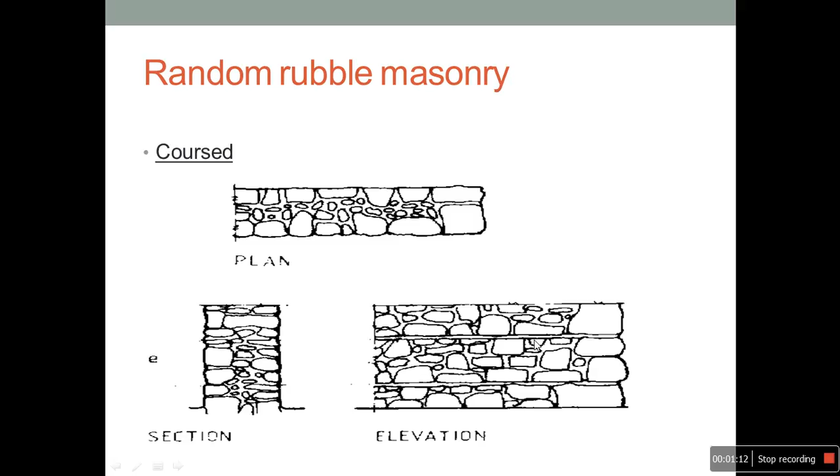This picture gives you an idea about random rubble masonry. Here the stones are placed randomly. The first one is a plan, section, and elevation. This is coursed type, in which stones of different shapes and sizes are roughly placed, and this is the cheapest form of stone masonry in which the stones are not cut into a desired shape.

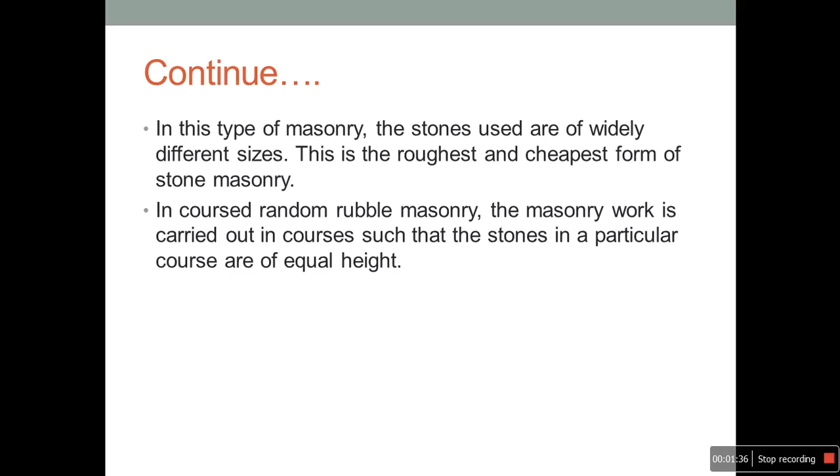In coursed random rubble masonry, the masonry work is carried out in courses such that the stones in a particular course are of equal height.

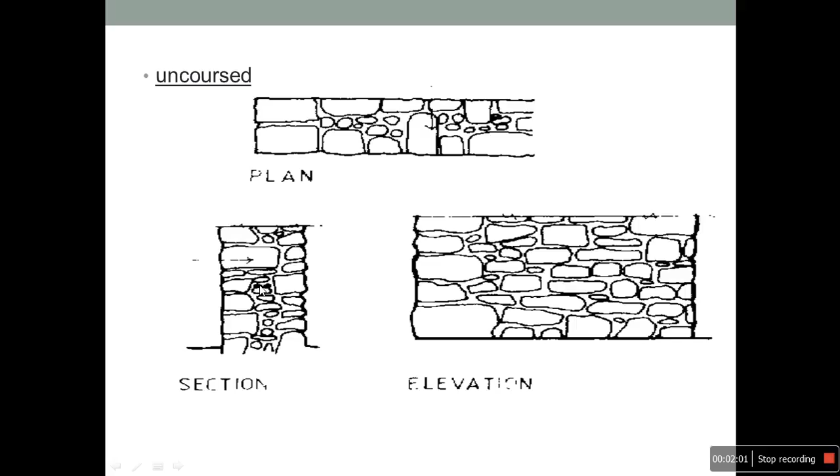In uncoursed random rubble masonry, the courses are not maintained regularly. Larger stones are laid first, and the spaces between them are filled with smaller spalls or sneeks.

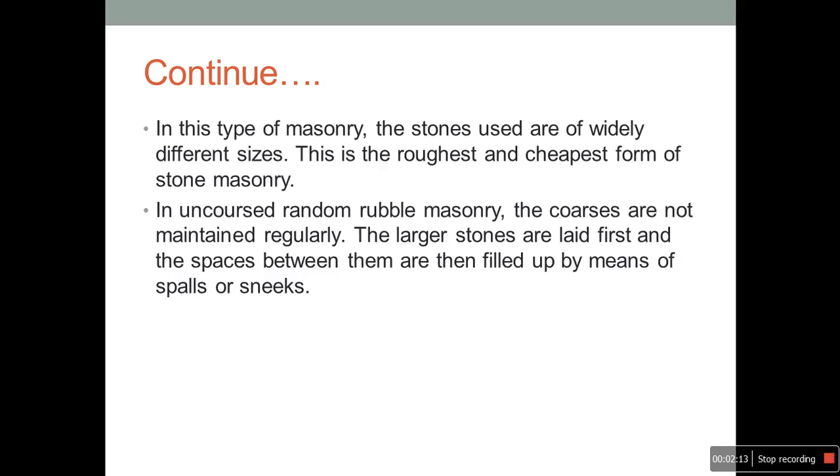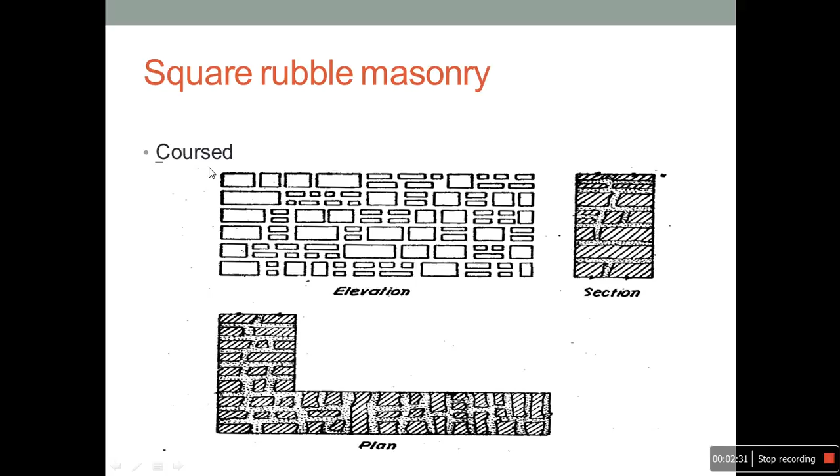Square rubble masonry is similar to random rubble masonry. There, different sizes of stones are randomly placed, but here the stones are cut into a square shape. This is coursed - you can see the elevation, plan, and section, in a regular sequence. This type of square stone masonry has a straight bed and the sides are used.

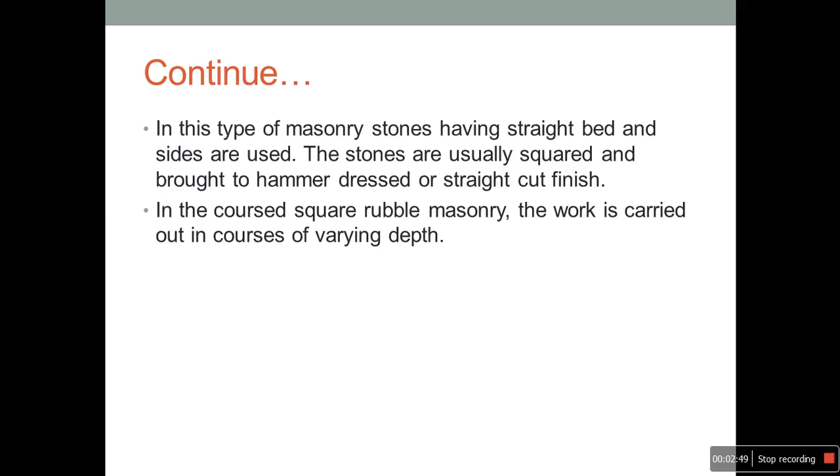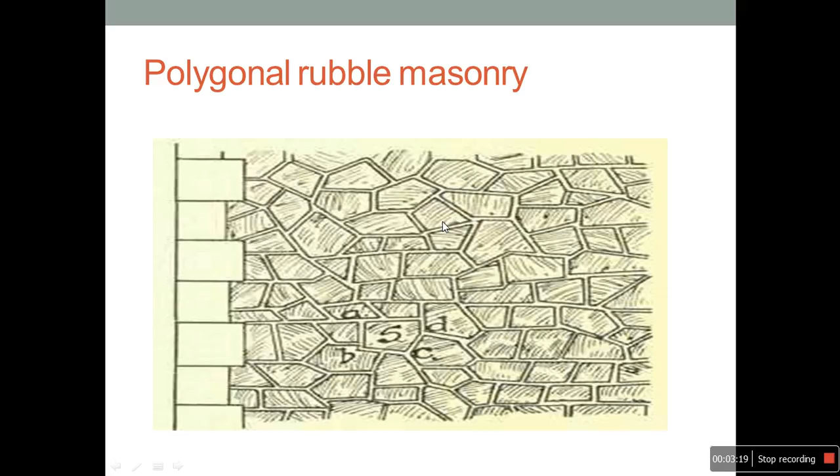This is polygonal rubble masonry, based on the shape - you can see the stones are in polygonal shape. In this type of stone masonry, the stones are hammered and dressed, and irregular polygonal shapes are maintained by cutting the faces of the stones.

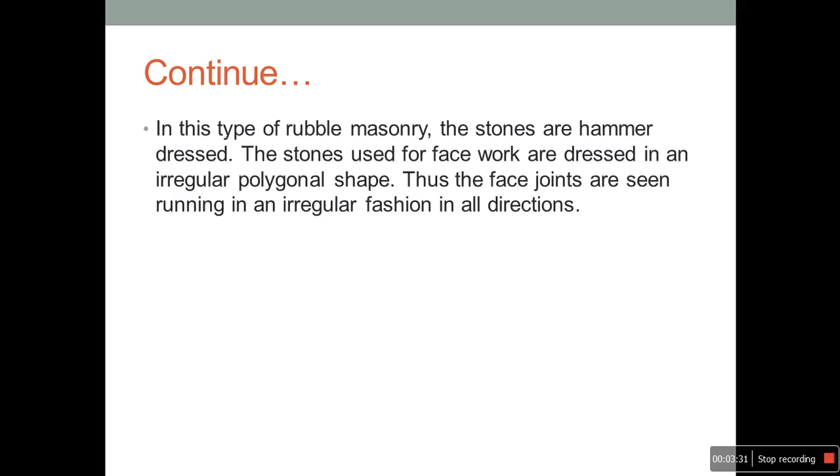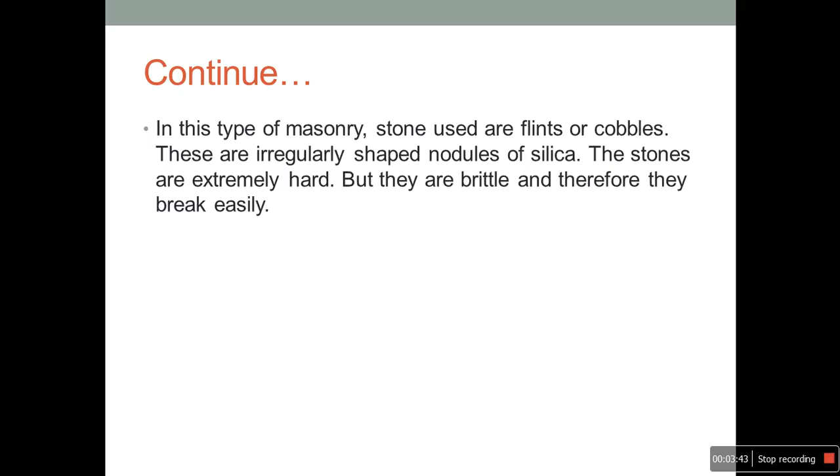This is flint rubble masonry. These are irregularly shaped nodules of silica. The stones are extremely hard, but they are brittle and therefore break easily.

This is dry rubble masonry, and these are the elements of dry rubble masonry. Back wythe, tamped gravel base for stable positioning, and in the construction, the first course is set in trench with the largest stones in front wythe.

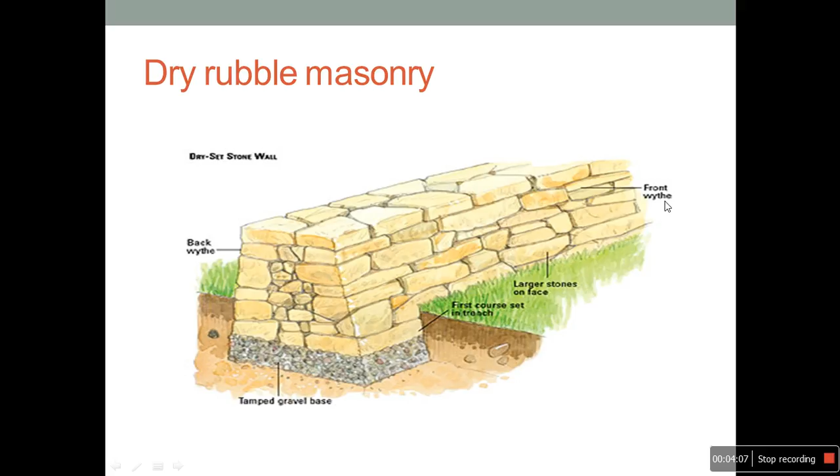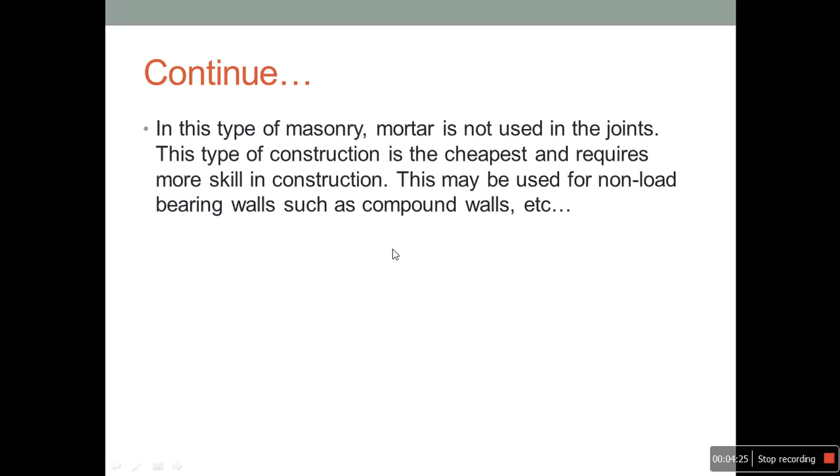In this type of masonry, mortar is not used. The self weight of the total stone helps the structure to build and stand by means of its own weight. It can be used for non-load bearing walls such as compound walls.

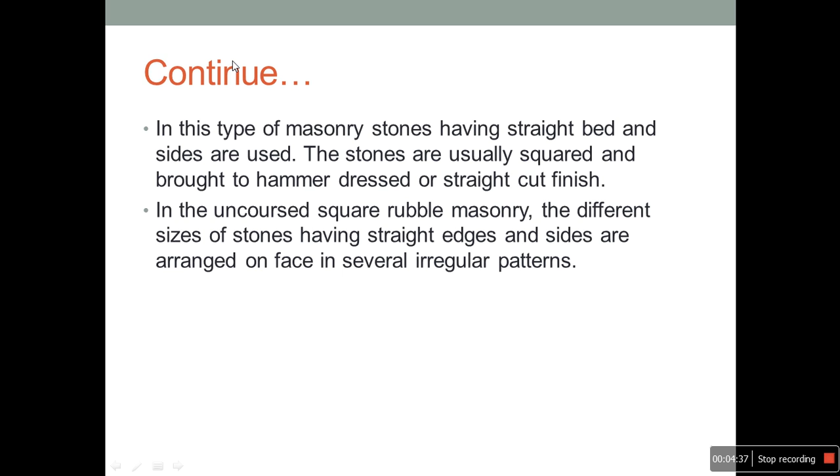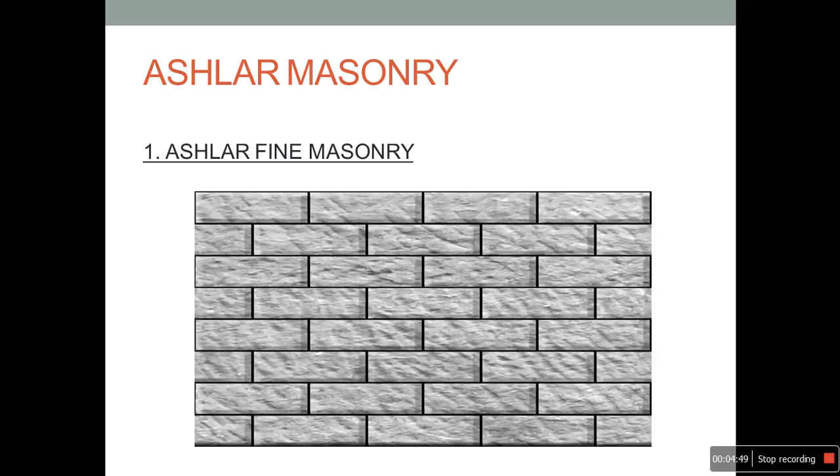So the ashlar masonry - as we have already seen the classification of stone masonry, the first one is rubble masonry, the second is ashlar masonry. Now we are going to see the different classifications of ashlar masonry. The first one is ashlar fine masonry.

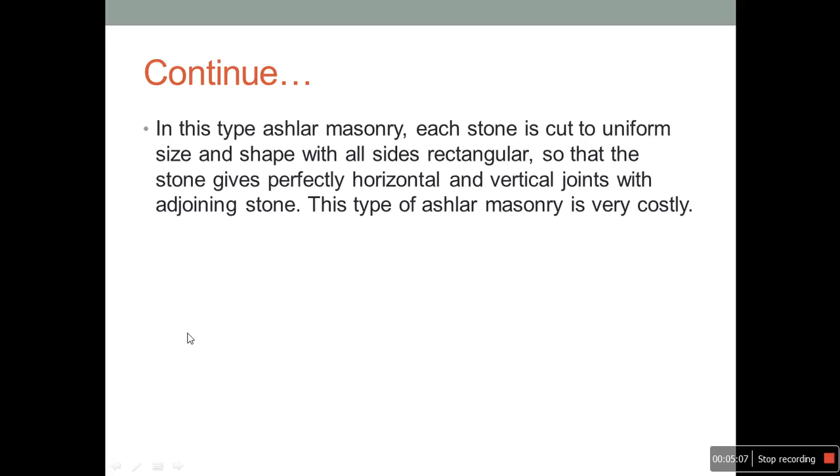In ashlar fine masonry, each stone is cut into uniform size and shape with all sides rectangular, so the stone gives a perfectly horizontal and vertical adjoining shape. This type of ashlar masonry is very costly because cutting involves cost.

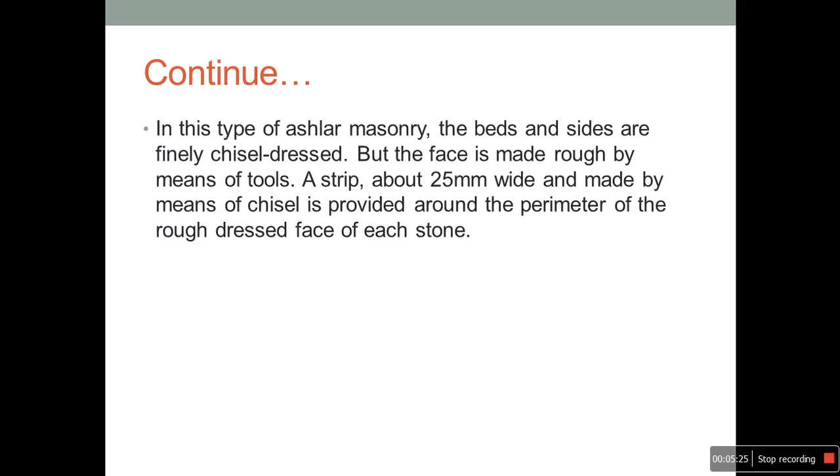This is ashlar rough tool masonry. Here the beds and sides are finely chiseled, but the face is made rough by means of tools. A strip of about 25 mm wide made by means of chisel is provided around the perimeter of the rough dressed face of each stone.

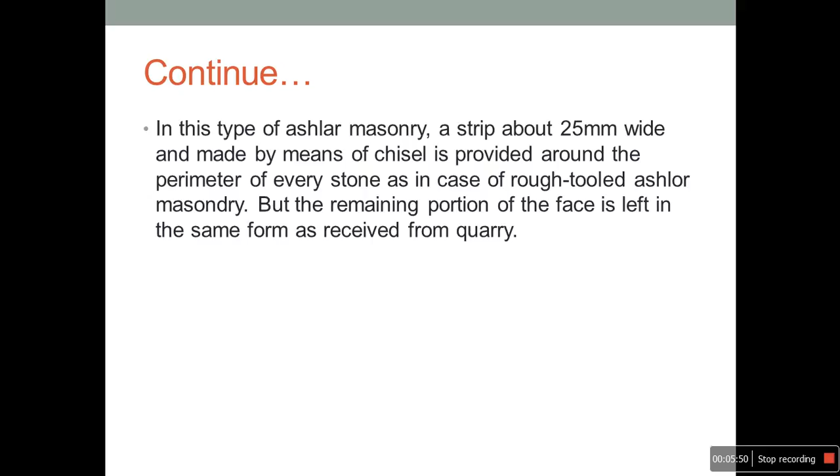This is an example of ashlar rock or quarry faced masonry. In this type, a strip about 25 mm wide made by means of chisel is provided around the perimeter. The remaining portion of the face is left in the same form as received from the quarry, so one side will be in the natural finish form.

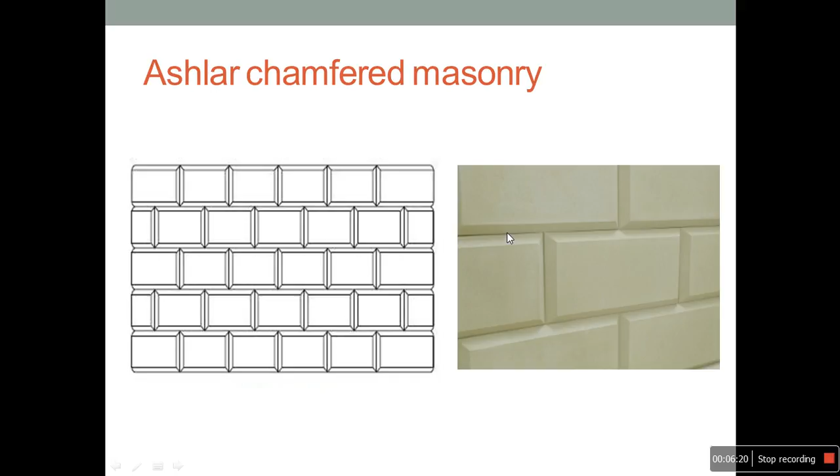This is ashlar chamfered masonry. This picture will give you an idea about chamfer, in which the strip is provided as below. The chamfer is beveled at an angle of 45 degrees by means of chisel for a depth of about 25 mm. This is an example for chamfer.

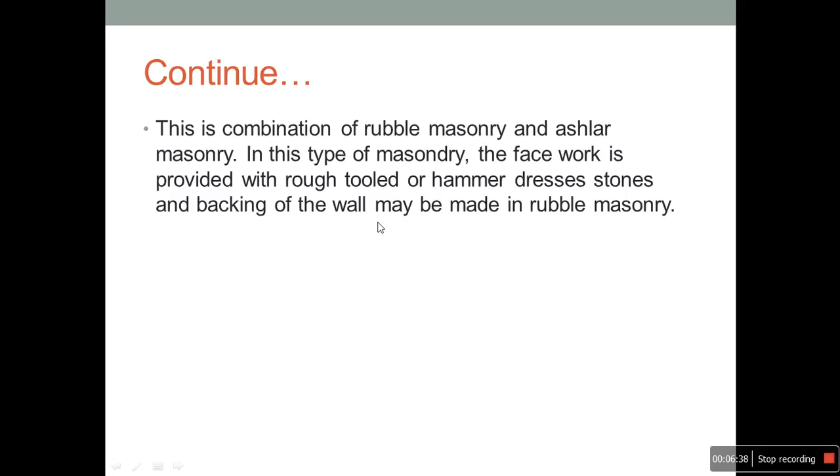Ashlar block in course masonry is the combination of rubble masonry and ashlar masonry. In this type, the face of the work is provided with rough tool or hammered finish, and the backing of the wall may be made in rubble masonry.